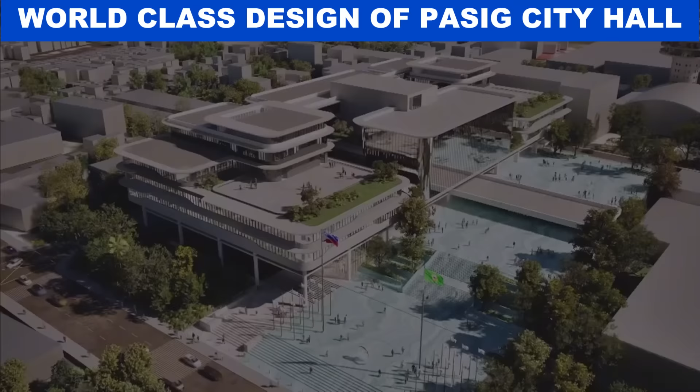Mga Pasigueño, narito po ang bagong City Hall. Panoorin po natin.

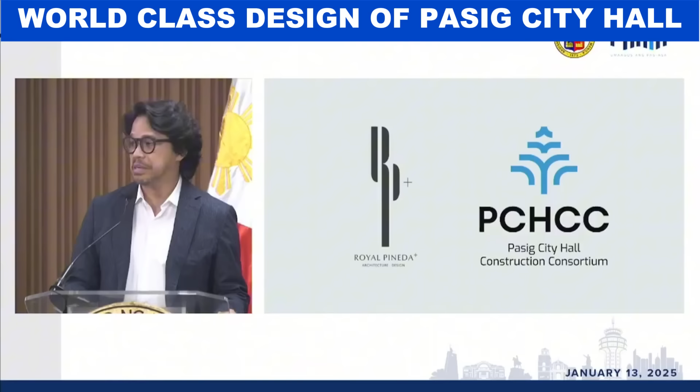As you've seen yung presentation ng Royal Pineda Plus, I am a Pasigueño. And this is something that really resonates in my heart because parang we've been constantly dreaming of a modern Philippines, but then suddenly binigyan ako ng pagkakataon para makagawa ng para sa Pasig, para sa sarili kong bayan. So, maraming salamat din, Mayor Vico, for this whole opportunity with our partners, with the PCHCC.

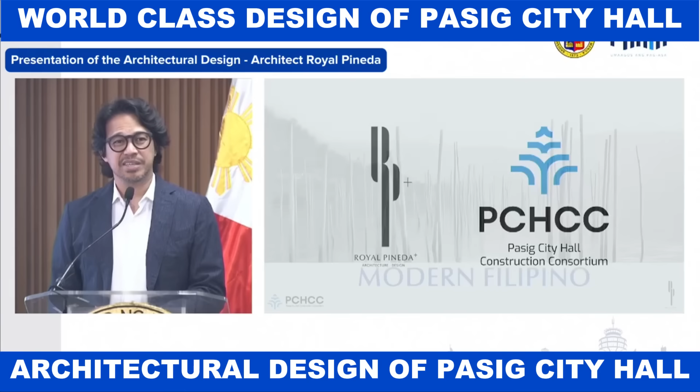I'd like to show you or tour you at least to the design, no? And what we have created as a group for the Pasigueños. So, again, kami ay advocates of the modern Filipino architecture and design. And this is why we're showing modernity as part of our betterment.

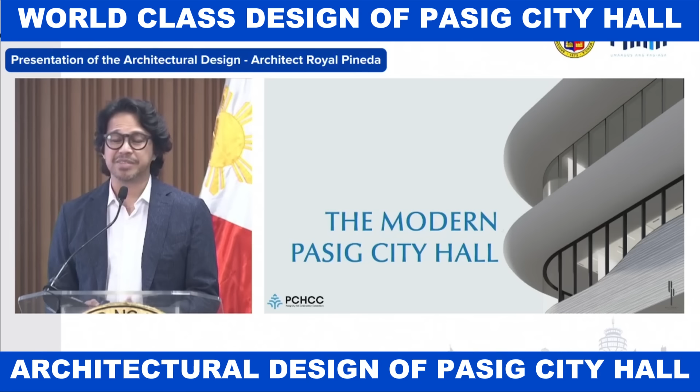It's never about the look, but it's really about the concept of having modernity or betterment. Ano yung progressive approach na ginagawa namin, and we felt that Pasig deserved something better, and Pasigueños deserve something better. And that's why we proposed that this design will be coming from the very iconic architecture of Pasig.

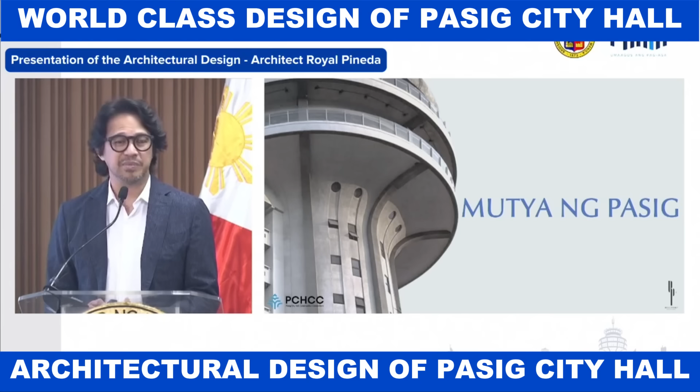Something that we all remember and always present in the city of Pasig, which is the revolving tower. And if you look at the revolving tower and the nature of Pasig, we believe that the Pasig River, the Baklad, the pearlized architecture - tawag namin pearlized architecture because we are basically, if you look at a pearl or an oyster, yung exterior part niya is very organic or rough, pero yung loob niya very polished.

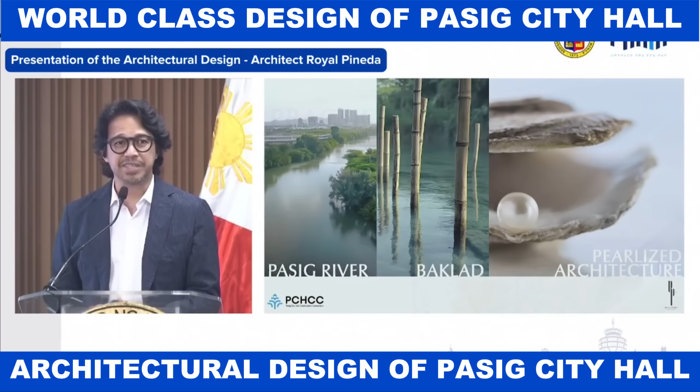So this refinement we want to bring to Pasig in terms of how we can create efficiency and how we can create and bring, no, the spirits of every Pasigueño lifted to a more global standard.

Something that we can all be proud of. And it has to somehow embrace this concept of practical luxury. This is still a government project.

We are very prudent in looking at the numbers. We are very prudent in looking at the budget. And again, we deserve something better. Hindi dahil gobyerno, kailangan pangit. Kailangan yung mura na hindi mo na magamit. Kailangan after 6 months, bulok na.

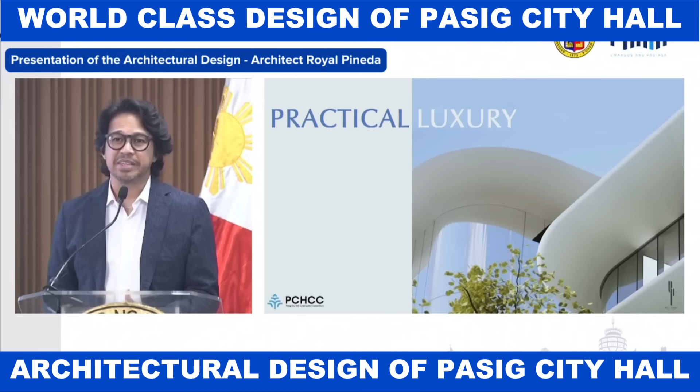This time, it is a project that's been hosted by Pasig, by the administration, thinking of what is the future. It should last 100 years, and we guarantee you that it will.

This architecture is permeable. Why is it permeable? Because Philippine architecture is always maliwanag. Kung titignan natin ang Pasig, ang Pasig ngayon is congested, puno na because of the population and because of the buildings.

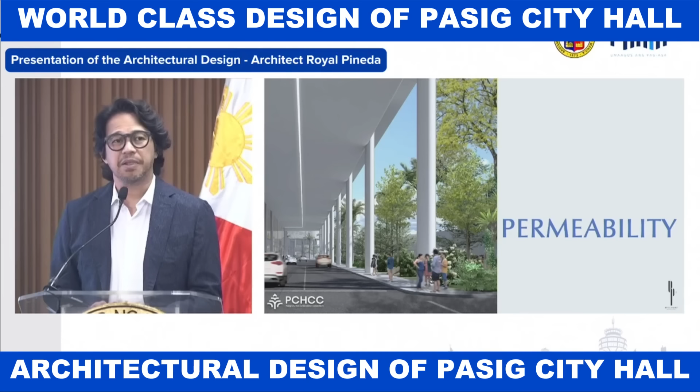But we have this big property of where we have the City Hall, and right now, we're bringing back the land to the people. So later, makikita rin natin kung bakit natin pwedeng ibigay uli yung lupa para sa tao at ang building magbibigay daan para sa tao, para gamitin ng tao at magkaroon ng plaza ulit.

Yung mga taga-Pasig dito, kung natatandaan natin, may octopus pa yan, mayroon palaruan. Natatandaan ko yan, naglalakad ako mula sa simbahan ng Pasig papunta rito.

And for me, it's something that I think we can share to the next generation. Pwede natin siyang ibahagi dahil sa paniniwala ko, buildings should serve the people and it should not dominate the land. So, meron kaming analysis, and again, the 2 hectares of land, hindi lang po yung building ang pinag-uusapan natin dito.

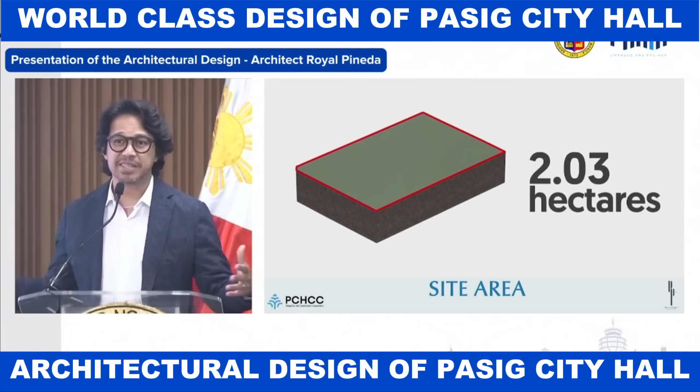Ang tinitingnan natin dito ay yung buong 2 hektarya. Na kung titingnan natin, meron itong 3 towers. At ginawa rin ito para maging efficient yung sistema at madalian ang bawat Pasigenyo sa pag-transact sa Pasig City. At makikita nyo rin, dyan sa image, we created an axis.

Kung bakit namin ginawa na nung pinlano nating gibain yung hindi na safe na existing City Hall, is because we also want to give the land back to the people and to also present the mutya ng Pasig, which is the revolving tower.

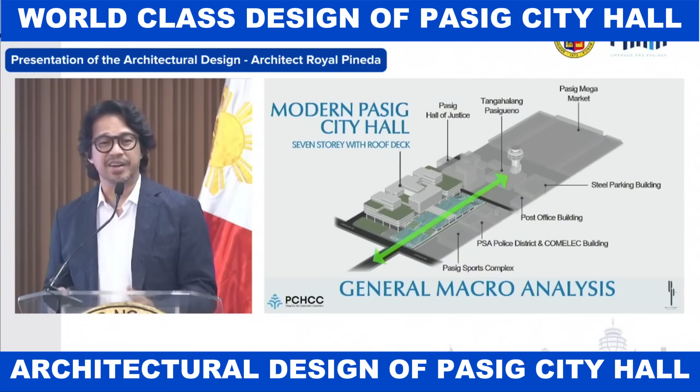So ngayon, pagka naglalakad kayo galing simbahan at papunta kayo sa plaza, makikita nyo na ngayon yung beacon, or ito yung pinaka somehow insignia ng Pasig. Ito yung makikita natin hindi lang sa umaga but also sa gabi, because iilawan natin, and with Mayor's discussion natin, parang we can make it even more beautiful.

So, yung konsepto ng 3 towers, again, pinasisimplihan natin yung takbo at ang sistema ng serbisyo ng Pasig City Hall. Kung ma-experience nyo from before at yung ngayon, temporary pa naman ito, makikita nyo masikip at may mga hassles tayo, hindi natin maiiwasan because we really need to zone each area, and Tower 1, Tower 2, and Tower 3 will be defined according to the use of each buildings, somehow to make it easy for people to find their transactions where they need to go.

So ito rin is designed with the architectural concept having that maaliwalas feel, where the air ventilation and light are all considered. And yung vertical zoning, ginawa rin natin, only because we need to make sure na hindi masasayang din yung oras ng bawat Pasigenyo na nagpupunta rito, na naghahanap. Imbis na diretso na sila sa mga transaction, we are also addressing that in terms of design.

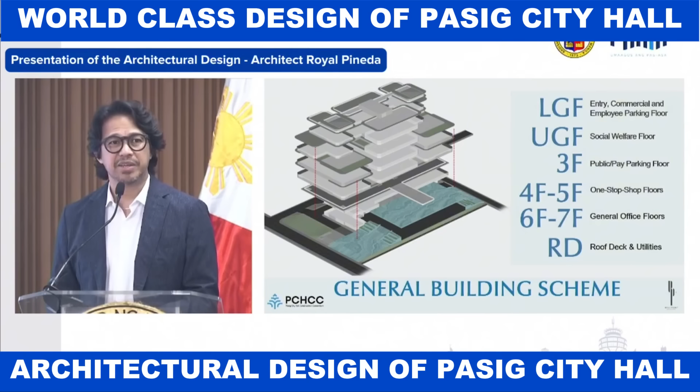And we have our architects here from the UAP of Pasig who are also somehow working with me. I'm sure ma-appreciate nila yan at makikita nila yan.

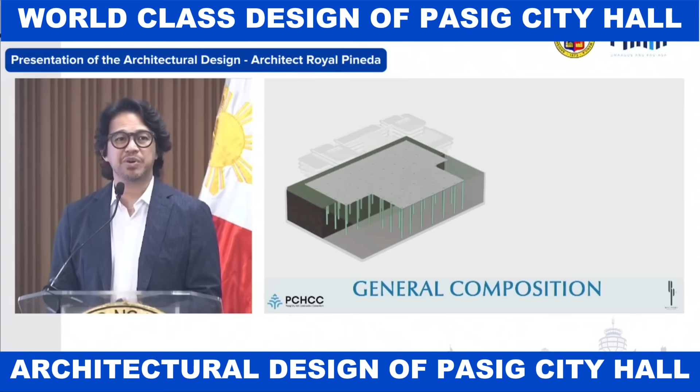So ang Pasig City Hall is an image of a stronghold of Pasig, or ito ang himpilan ng mga Pasigenyo at ng gobyerno ng Pasig. So we would like to see this as the last building standing, and we designed this to be very strong, structurally, with engineering from our partners, wherein we have 75 piles. Mamaya ipapaliwanag din sa atin ni Engineer David itong lahat ng dinisign ng grupo para maging matibay at safe itong ating City Hall.

Kung makikita nyo yan, that's 37 meters deep, parang doble yung building. Pag tinignan nyo yan, pag lumindol, you can actually stay safe in the building. You can actually stay in the building. So yun yung konsepto. At mamaya, mas detalyado, mas maipapaliwanag ni Engineer David.

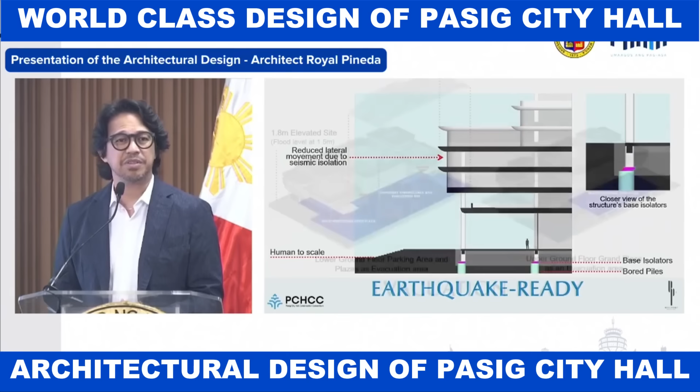At sa atin, ito ay first in the country for a government building to have this kind of engineering solution. At this is because hindi lang natin gustong ilagay yan, it's because we are near the fault line. I think we're only 200 meters, how many meters away from the fault line.

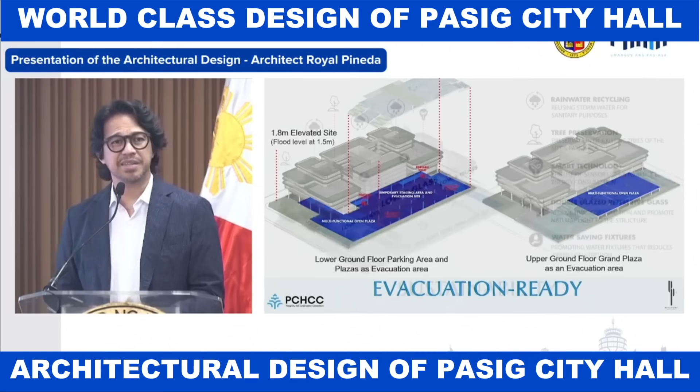So, again, we are making this sustainable as a building. We are making it nature-driven, and that's why we're very conscious about the performance of the building. We have automated system para lahat maging efficient sa kuryente. And nakita natin yung araw, how many days to build this project.

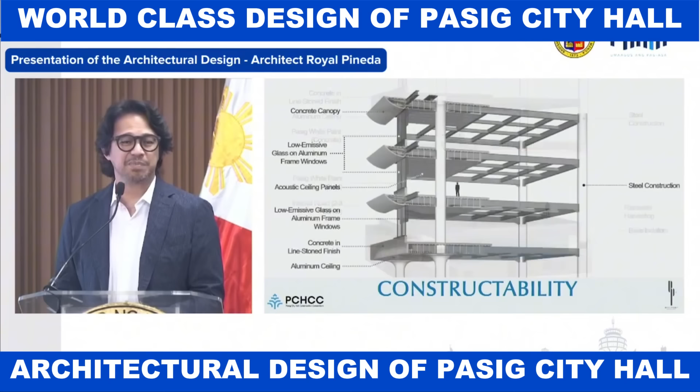Naniniwala kami na kaya namin gawin ito. We're betting on it. Natapos namin yung Clark ng 18 months. And we're back here to prove another timeline. And hopefully, God bless us with the timeline. Pagtulong-tulungan na lang natin. But it would be another achievement for Pasigueños and the engineering team and all the members of the team to do this project. We are building this the fastest possible way we can without compromising the quality of the project.

So, I just want to tour you quickly on the spaces. And again, ito yung pinapakita namin na suddenly in a city that's congested. And I always say congested because the whole Manila is already congested. Ang laging sinasabi ng maraming city is that wala ng lupa ang Maynila. We understand that, and that's why this solution can be also a perfect model, not just for the Philippines, but for the whole world.

Wherein, if you notice, all of a sudden, bumalik yung plaza. On a weekend, it would be nice, Mayor, kasi sinasara natin yung Caruncho Avenue. It would be nice now to continue that plaza all the way to the revolving tower. And that is, again, the whole point to bring back the land to the Pasigueños.

So pag nakikita natin ito, this is again the whole novelty of the project, is that efficiency because the land is so premium, so we went vertical. We created the architecture that is distinct and actually inspired by the revolving tower.

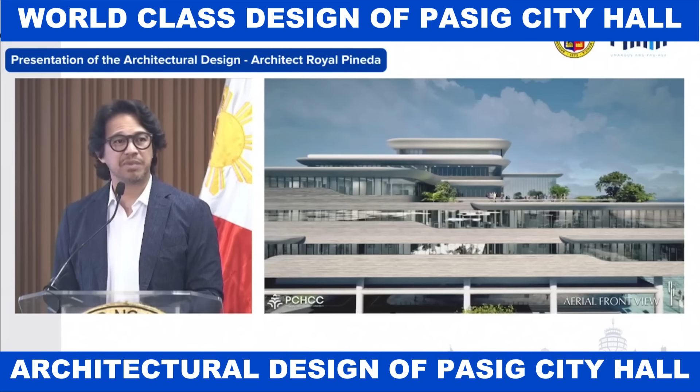So if you notice the skin and the curves, which are actually inspired by the shells and the oyster and the pearl, this is happening because we see that the revolving tower and the development itself is the mutya ng Pasig. So, bakit natin ito ginagawa?

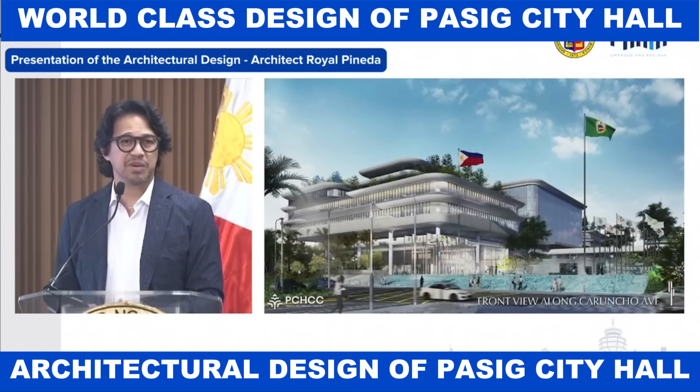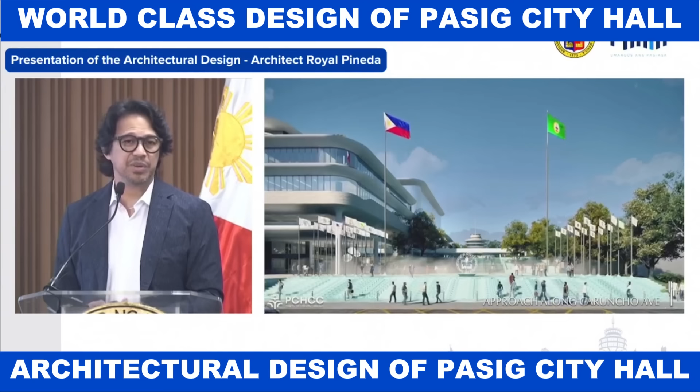Because, again, we want to make sure that we make things more efficient for everyone. But through the partnership and the team, we would like to somehow bring good design to everybody. And, again, the point here is to uplift the spirit also of all the Pasigueños.

So, what you see has a misting effect because we are a tropical country. Instead of a fountain, this misting effect is also part of mitigating the heat. Kasi tropical, mainit, but it's also part of the design of the whole plaza.

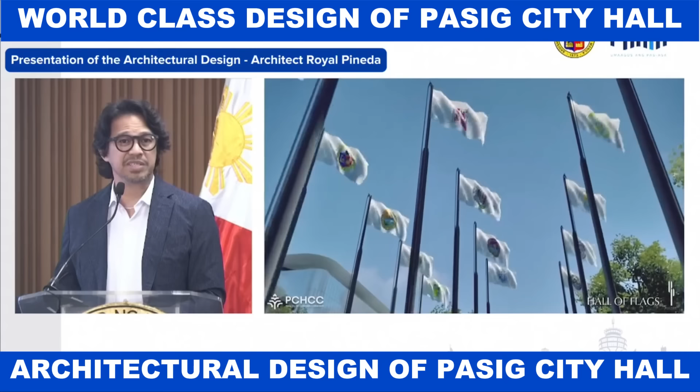So we will have all the barangays, the flags. We'll have the Hall of Flags. And this is again a symbol of unity for the Pasigueños because we will house all the barangays and all the members of the leaders of the barangays to be able to serve their constituents also in a better way. And at the same time, the City Hall can host all the events and the spaces that is needed in functioning and serving their people.

So, if you look at the entire architecture, again, we designed this to be easy for maintenance because let's accept it, government is government. Minsan talaga, ang maintenance ng government is mabagal at matagal, Mayor. So, hopefully, we'll have a private partner to do that.

Architecture-wise, again, what we want to show here is that this building will be done with efficiency, with cost-conscious efforts, but we will never compromise the functionality of the project. This time, we will prove that this model can actually be for the country and for the Filipinos.

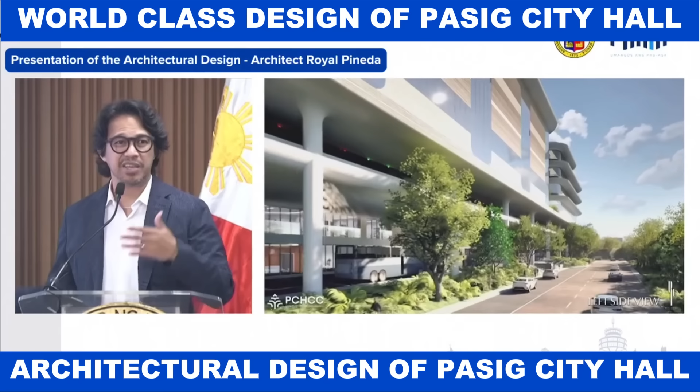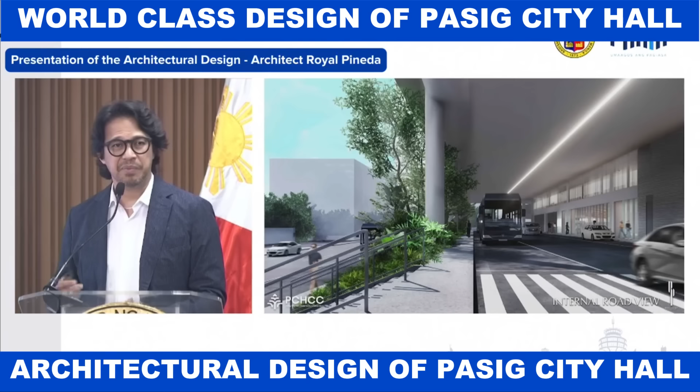So, even the road network you see has a bus that can accommodate on the left side because we are trying to also ease up the traffic around the existing roads of the City Hall. So it can fit, actually, there are 3 or 4 lanes inside the compound. So you can see that there's a bus, there's 2 vehicles moving, and 1 vehicle as a drop-off. So it will be more spacious and again, more efficient.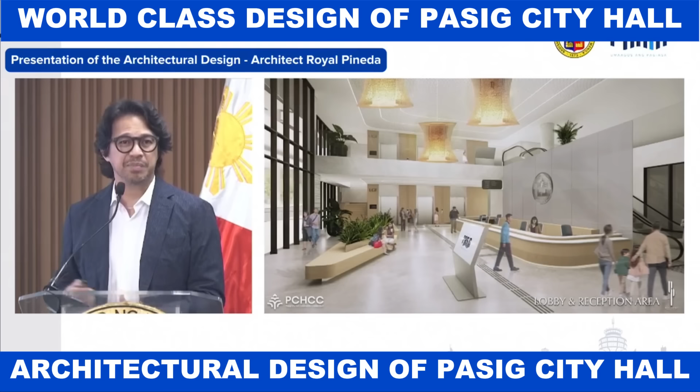And for the interiors, we would like everybody to see that being practical and being simple can still be premium or sophisticated in a way that the space is well-arranged and performs well. So, what we want to show here, this is gonna be within the budget but good design. We don't need to compromise what's beautiful and what's proper just because it's a government project.

So, we have all the one-stop shops, all these places that we need, again, we just want you to understand that this will be very easy for you to use because if you notice the signage on the floor below, these are all the signs and wayfinding. This is how you can find your way to your destination.

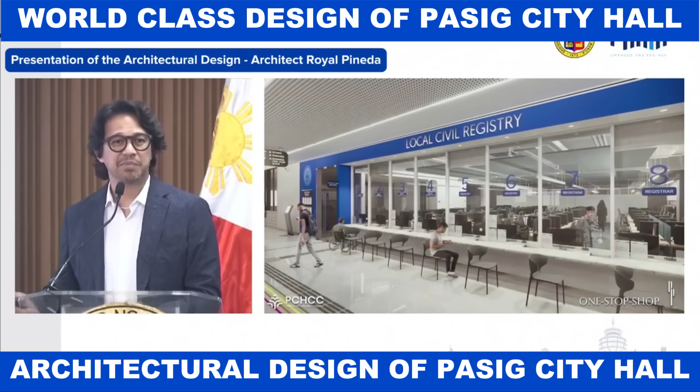All of that was designed by the group to make it easy for every member of Pasig to find where their transactions are. And for the people who will be working in Pasig, the City Hall, we want to give you a very, very good space that will make you work better. So that you'll enjoy coming to work and reporting to the office.

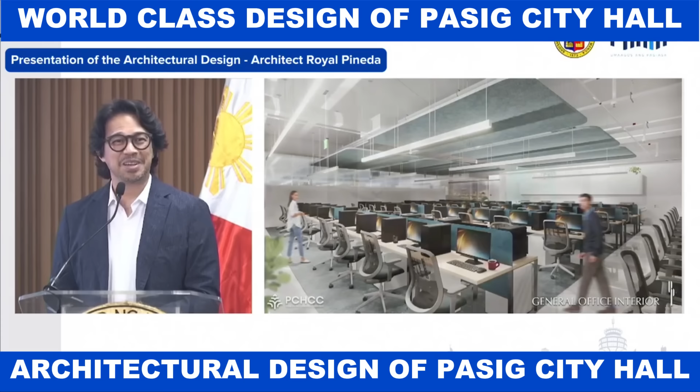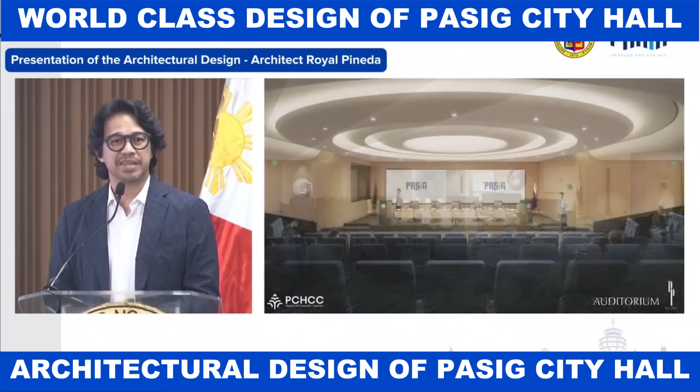So, this is also the City Hall Department. All of that will be international standards. We will be following the health standards required by the government also. And of course, our session hall, we also want it to be beautiful so that our users will enjoy it, at the same time our auditorium.

So, all of these things are part of the, small part of the whole project because there's a lot of things embedded in this architecture. There's a lot of things that's actually embedded in the function of this project. And we're all excited to do it and make it happen so that we don't have to talk, but we just want you to enjoy the place and the architecture itself.